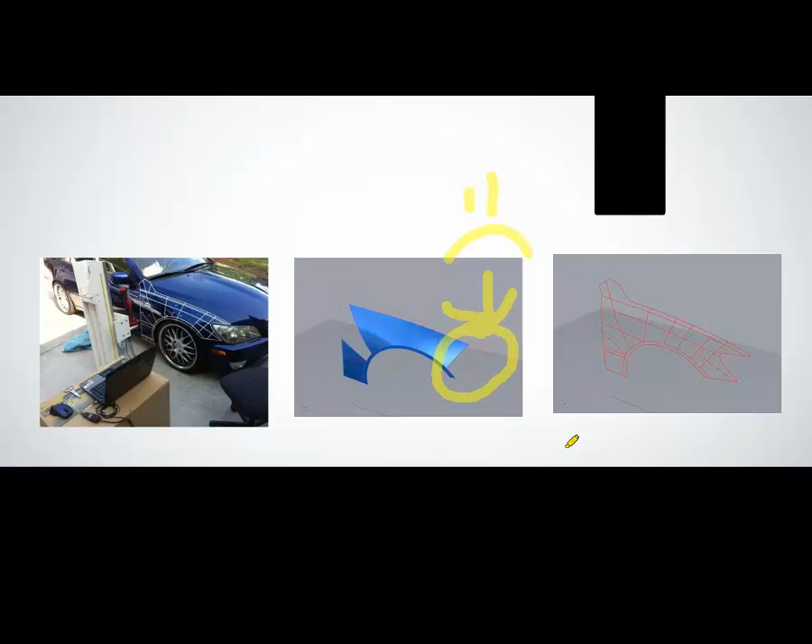You'd rather overbuild that surface and then just trim it back. And then another couple things we noticed looking at this is there's a couple funky n-gons in here -- a couple five-sided faces, especially toward the rear, going up at like a 45, there's an n-gon in here, right in there.

So there's a couple different things you could do. Yeah, so that's going to cause you a bunch of problems. Yes, frowny face indeed.

If you want to take the super simple Kyle approach, which is make it as basic as it can be until it falls down upon itself, you would simply suspend any and all thought process while doing it. Right, just mash the buttons until it works. Just mash the buttons with your elbow until something happens.

You could weld together that gap between that rear-going panel and the one that goes up at a 45. Exactly -- you could just weld those together and you'd have a much, much happier topology, something that you can go from.

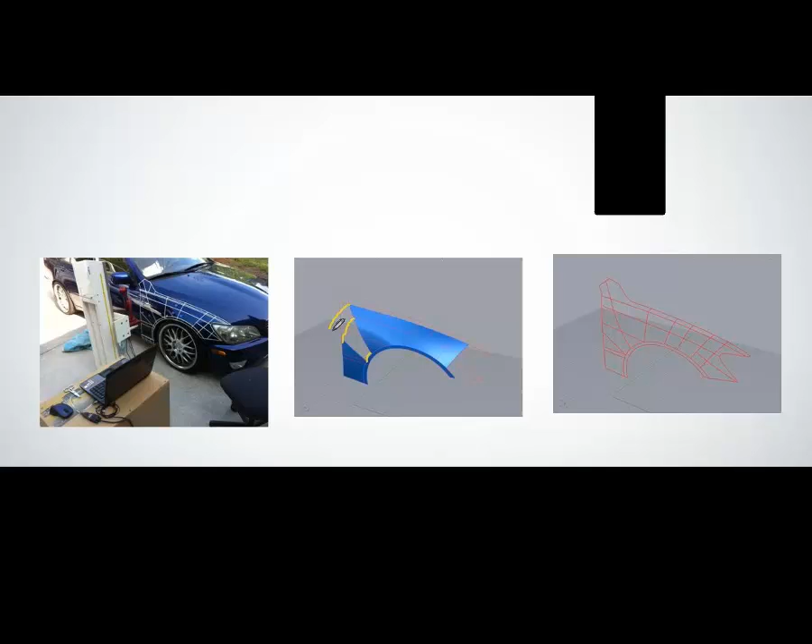Yeah, right. Don't even bridge that. Just weld that and then move that vert, that corner top vert, backwards to where it really should be. Yes, exactly. So Kyle, you want to talk any more about this?

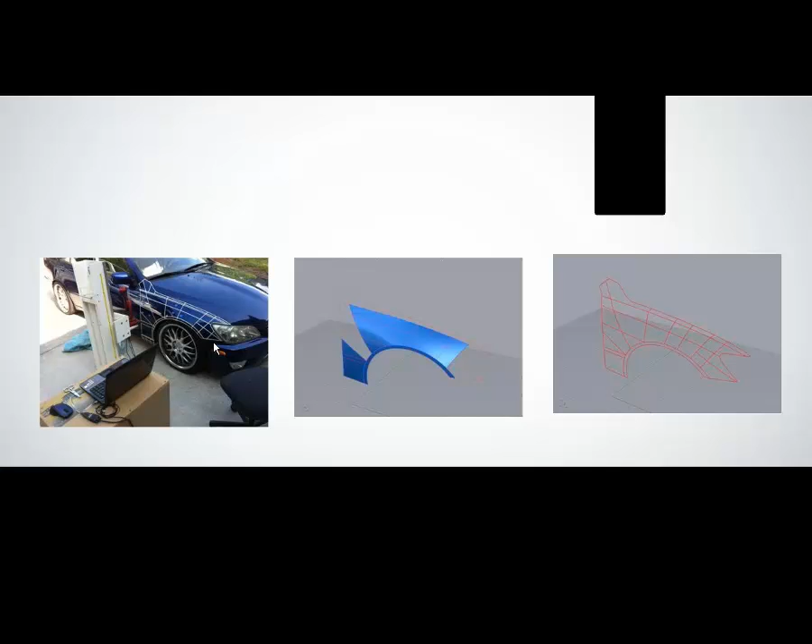I tell you what, why don't we shoot over to your screen and show a little example about how to lay something like this out, and we'll talk a little bit more about that. We were looking at this yesterday, and we were having a bit of fun with the amount of stuff that was laid out on that screen.

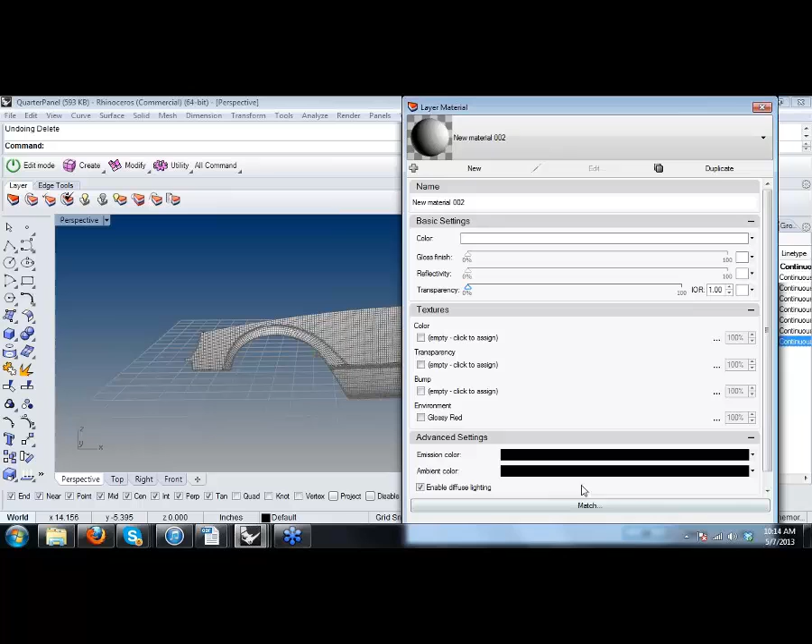There's an extraordinary amount of complication going into that fender, and I want to show you how Sky would handle this. Let's just assume for the purposes of argument that this is a scanned fender, and you are talking about how to reverse engineer it.

And so Sky's going to show you how to do this. He does this a lot. He's way better at it than I am. So I'm going to have him demo it, because he actually has some appreciable talent, whereas I'm good at convincing people that I'm talented when I'm really not. So let's go ahead and let him show this, and then I'll come back and yak at you a little bit after he's done. Actually, I'll probably stay on and make fun of him along the way.

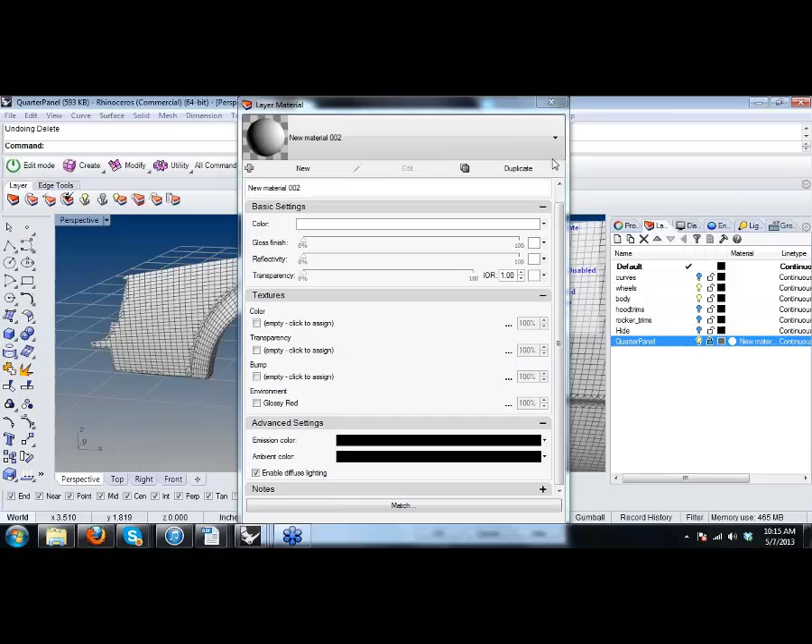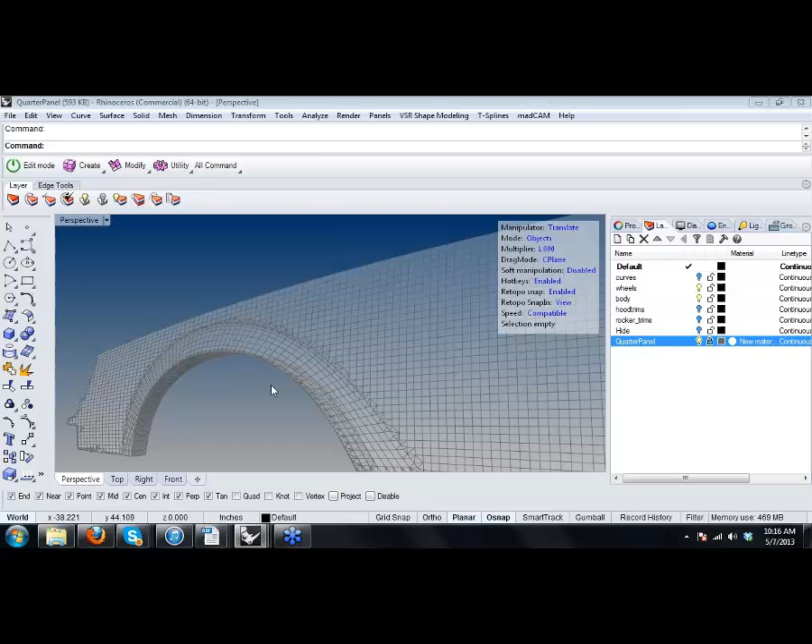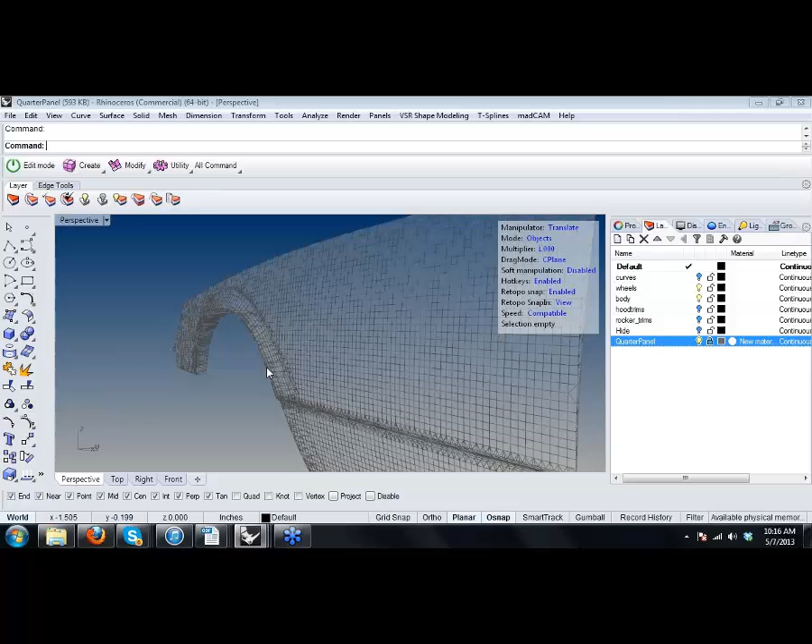Well, we're going to look at this thing then as a mesh. So we're kind of faking some quarter panel data here, like faking it as laser scan data. We just took a car model and turned this car model into a mesh. We're pretending that this mesh data here is laser scan data, because typically when you get laser scan data, it's mesh data. So what you've got for just this quarter panel is it gets really thin up here. You've got this sort of fender arch here. And the rest of it's pretty darn simple and smooth. And then down here, you've got a little bit of a return.

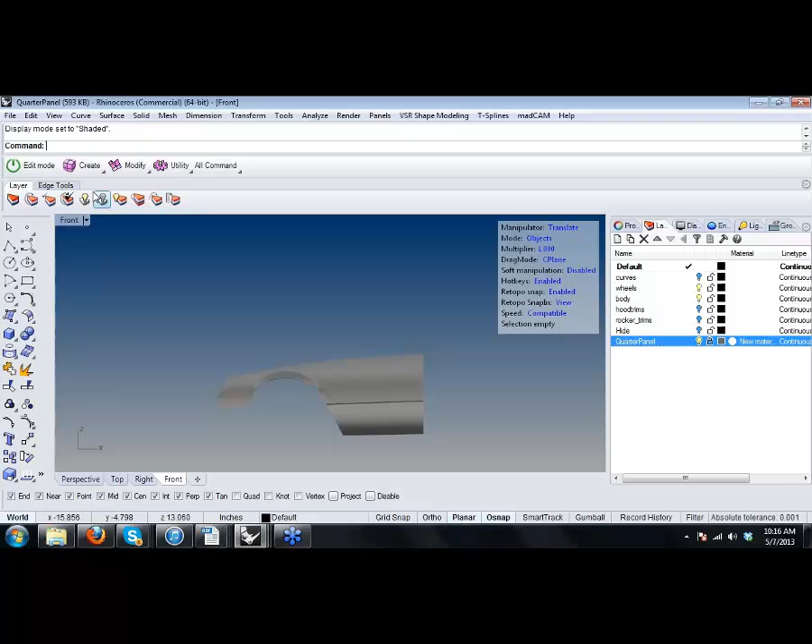And so the way that I would think about doing this, first of all, all of these quarter panels are going to get made really the same way in terms of patch layout, which is to say that you're going to have, let me just make a little face here. Okay, so all these quarter panels, they all start in exactly the same fashion.

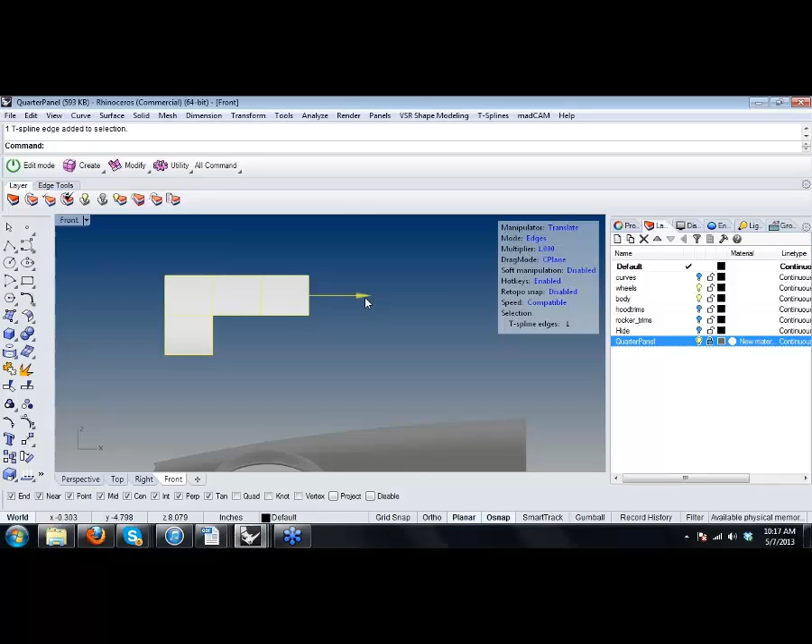Oh boy, let me turn off my Retopo snap. There we go, thank you. Now let me put this in box mode. So in its simplest form, every single one of these quarter panels is going to end up looking just like this.

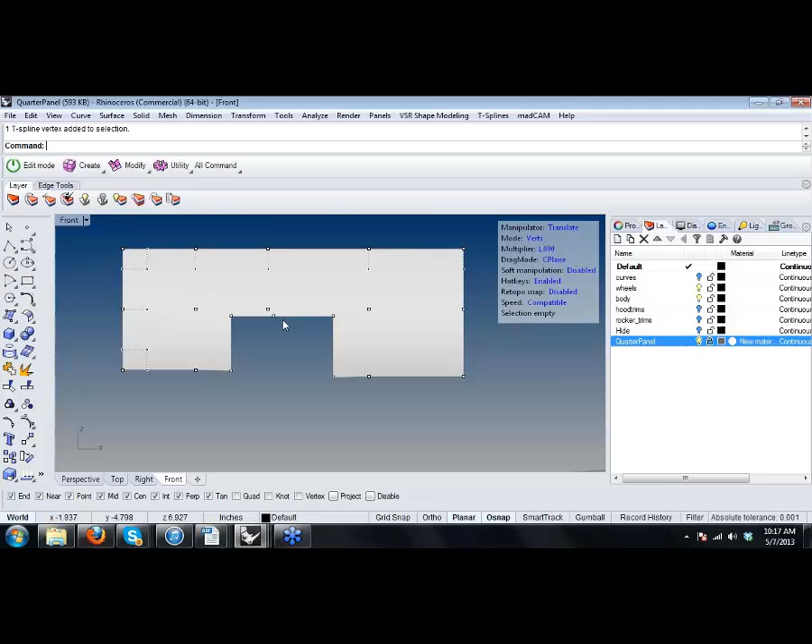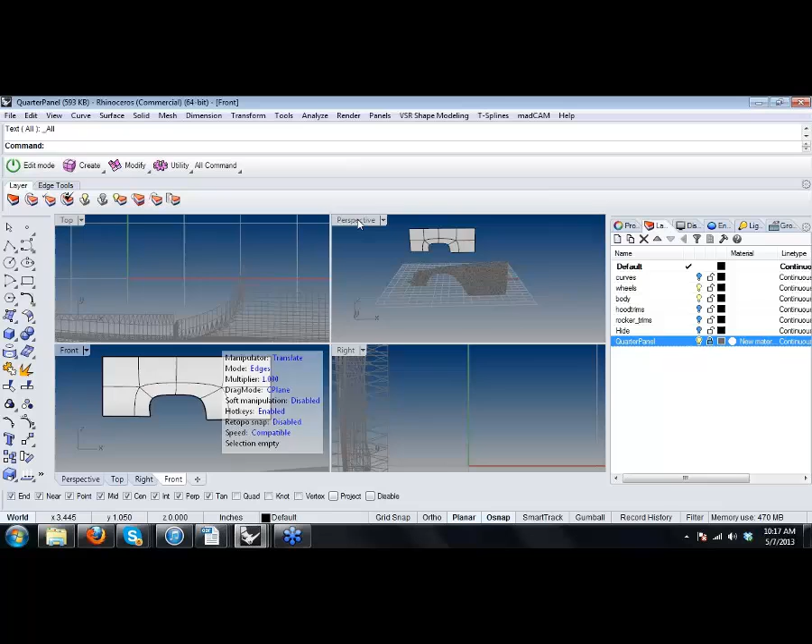Where you punch a hole in your T-spline, and then you extrude it inwards. And so you really want to try to never make them, like Kyle said, more complicated than they need to be. So you can see I can grab this here and just kind of bump it out. And we have the very proto beginnings of what this quarter panel should look like.

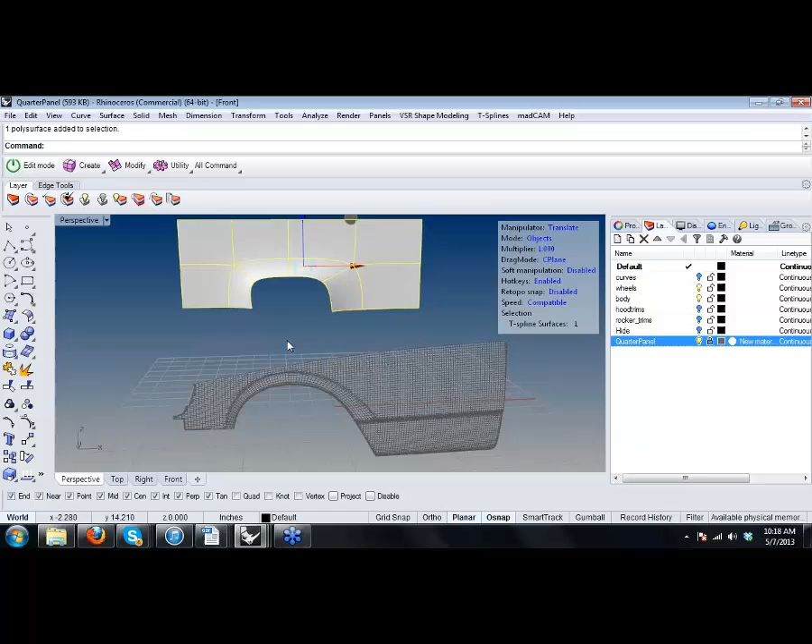Now, when you get to something specific like this actual quarter panel instead of like a proto quarter panel, let me leave that up for a second. You've got this row of faces running across the top, and then you've got a row of faces, or sort of this arch here that forms this kind of break, and then you've got these edges here that form the interior.

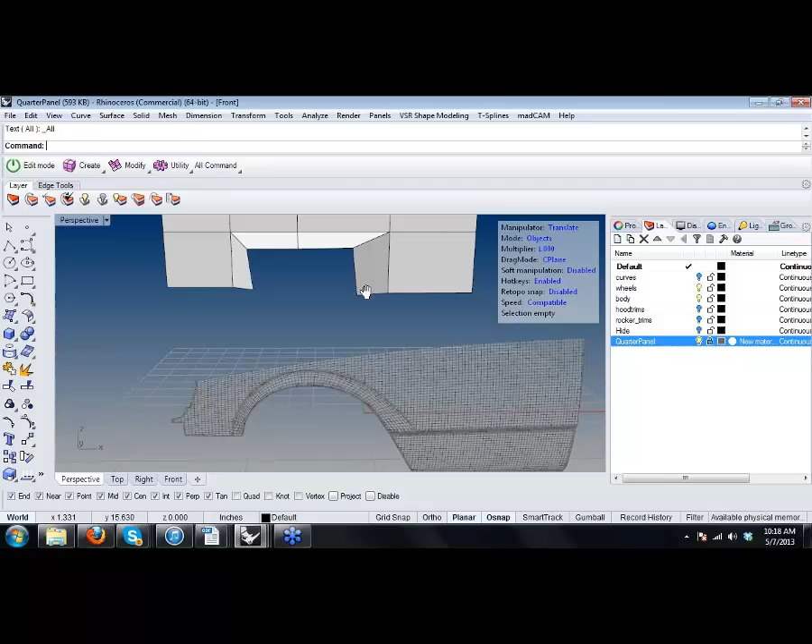And so when you think about this one in specific, you realize that this row of faces needs to get really, really skinny up in here. And then it can sort of expand out a little bit if you need. But what I would do with this thing here, let's get rid of our proto panel. And let's get our actual one.

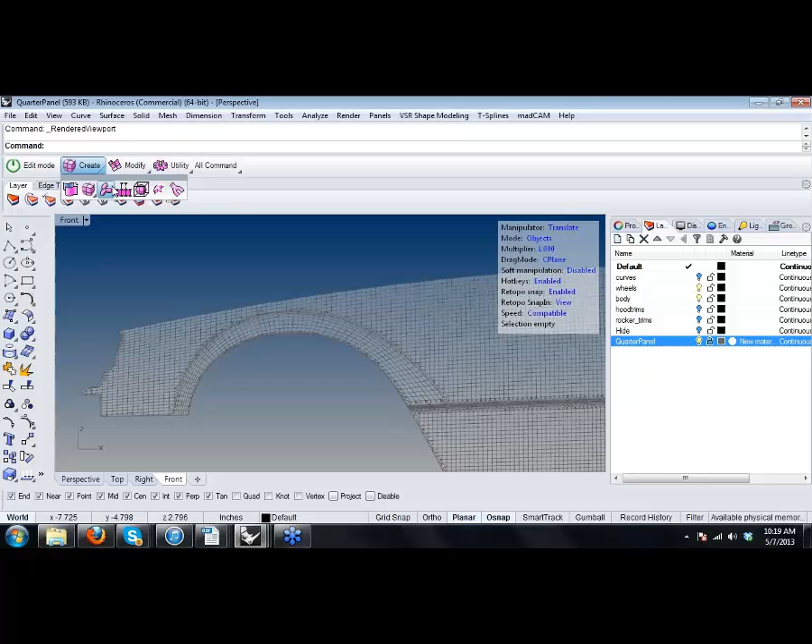And I'm going to turn, in this case, my retopo snap on. So it's just going to map faces right onto this. And I'm going to use the append face workflow. So I know that I need a strip of faces across the top, and it's got to be really, really skinny, right? It's got to be really thin to make that.

I'm already thinking about how I'm going to extrude in. I usually want to make those extrusions come at a 45 here and a 45 here. So if that's what I want, I need to move this here so it can come in at a 45.

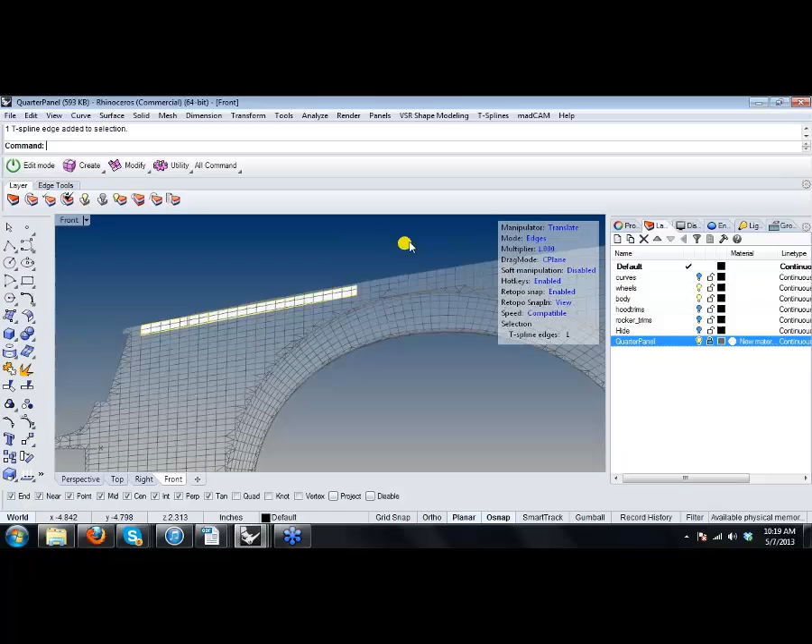What I'm going to do now is bring a face to right here, so all I'm doing is alt-clicking. I hold the Alt key and bring it over. I've got my retopo snap on, so it's retopo snapping as it goes. I'm going to hit this one here so it extrudes inwards in this direction.

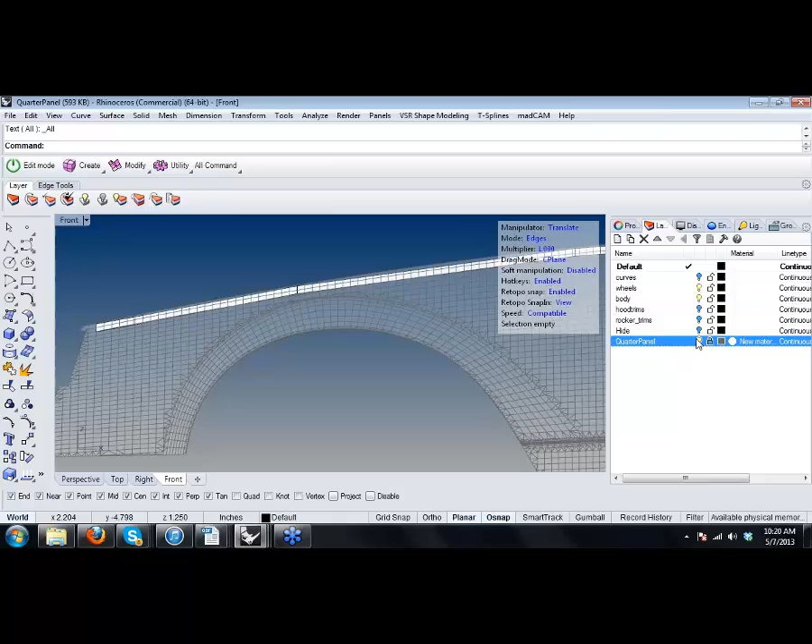Then I'm going to bring up one more, just like this. So I've got this super skinny T-spline right now. Let me turn this off - just a little thin strip, just the beginning of where I want to put this stuff.

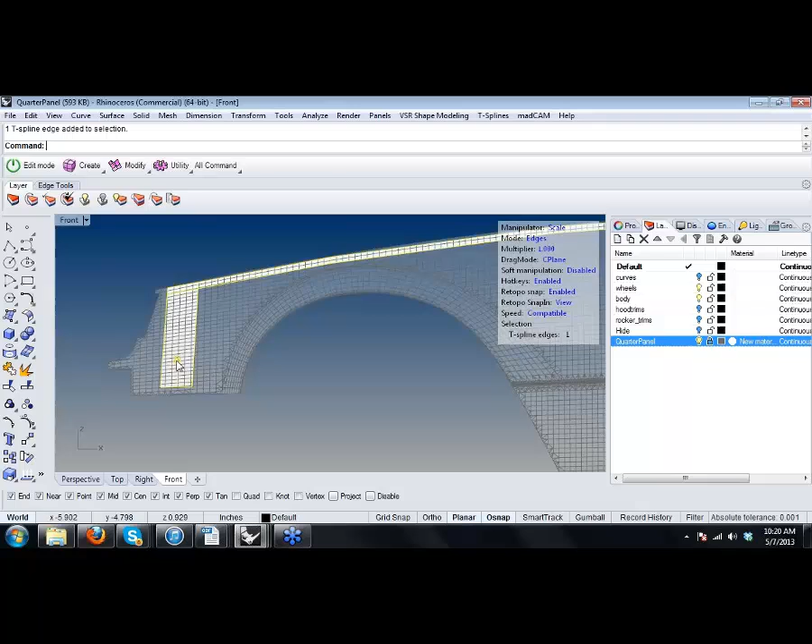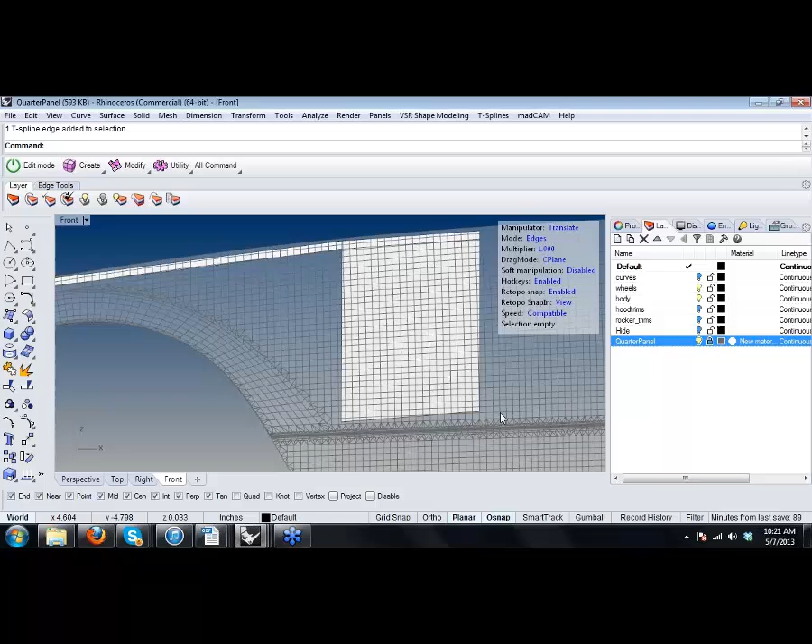Notice everybody how simple this is - he doesn't have a million faces in here, these are all just minimal. You always want to start simple, keep saying it over and over again. Simple, cannot stress that enough. Really cannot. Because you can always add verts, add complexity, geometry, but like Kyle says, the less stuff you have, the easier it's going to be to edit this thing, and typically the smoother it's going to look.

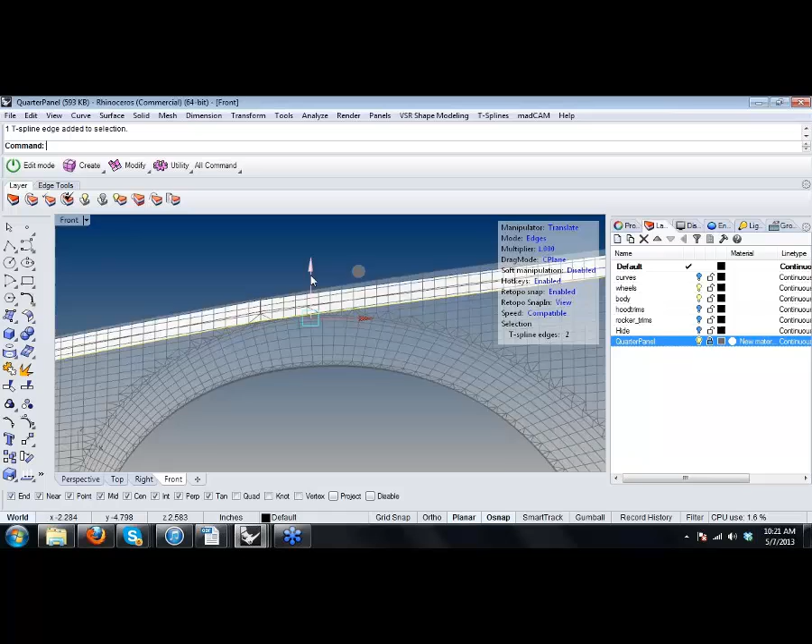So now I've got something I can start to play with, and I'm going to again alt-click, so I'm extruding inwards now. I'm just going to deal with this little strip first. What I'm going to do is take this vert I created and bring it into here. And this vert, I'm going to bring it into here.

Okay, so if I try to go smooth on this thing, it just all sort of falls apart because I've got this funky thing going on. But what I can do now is extrude this - I alt-clicked and brought a face off here, and then I'm going to select this vert and weld it to this vert.

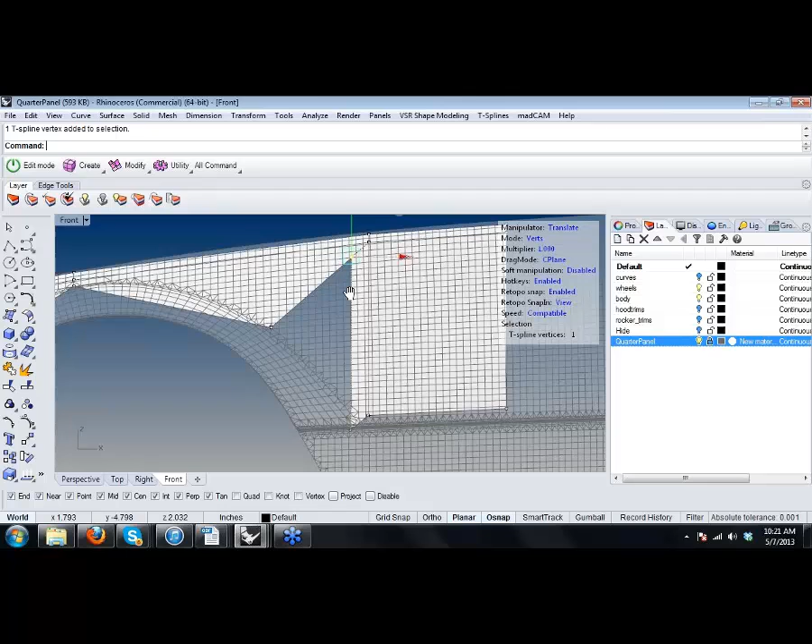I'm going to do the same thing over here. I'm going to bring this vert kind of over here. So you can see what I'm doing is trying to line these verts up for now, just along this break between the smooth and this bump out.

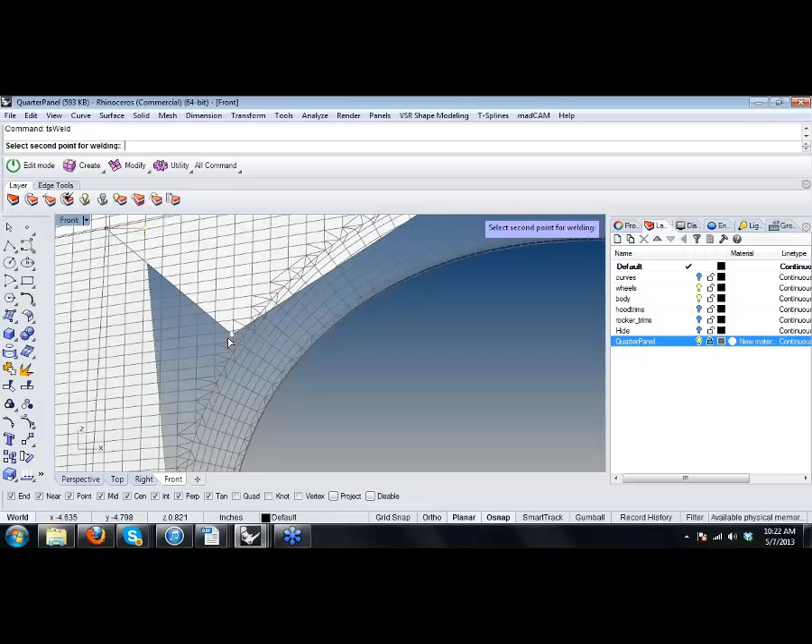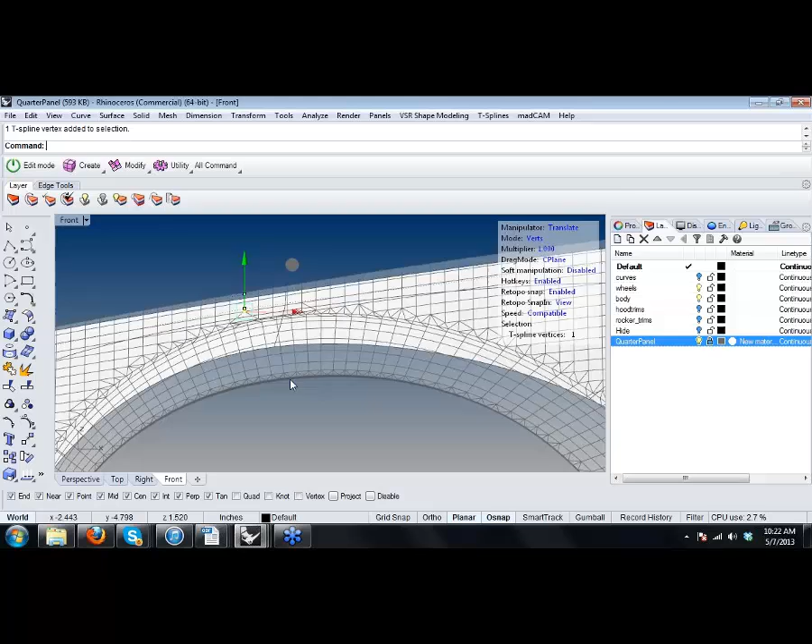So now when I go to smooth it, I've actually got something that - this is so incredibly loose right now that it's not really going to stick all that well to my actual data. I need more density than this, but it's at least topologically correct. This at least gives me a starting point of where I can build this quarter panel from, and it's at least correct, right?

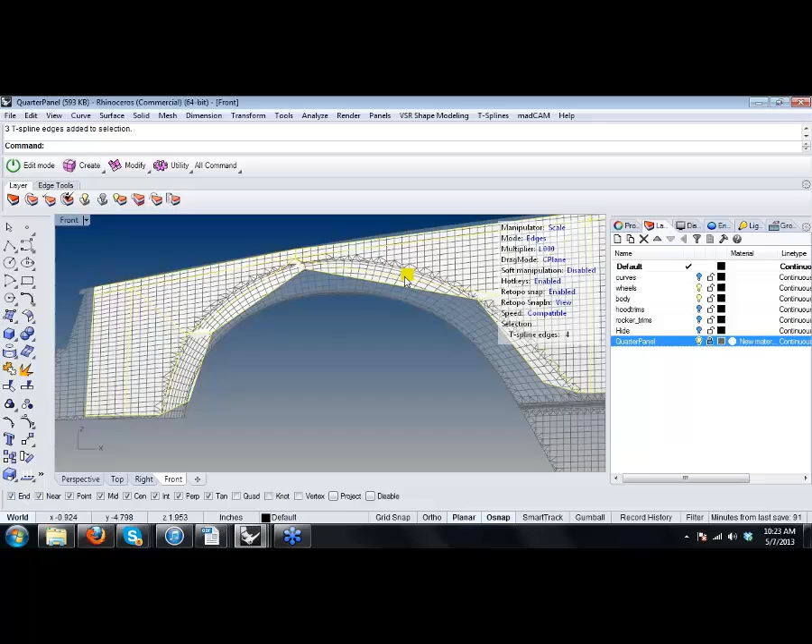So now that I've got this, I can grab all these and extrude inward here. And so all these points are going to form the basis of the edge here.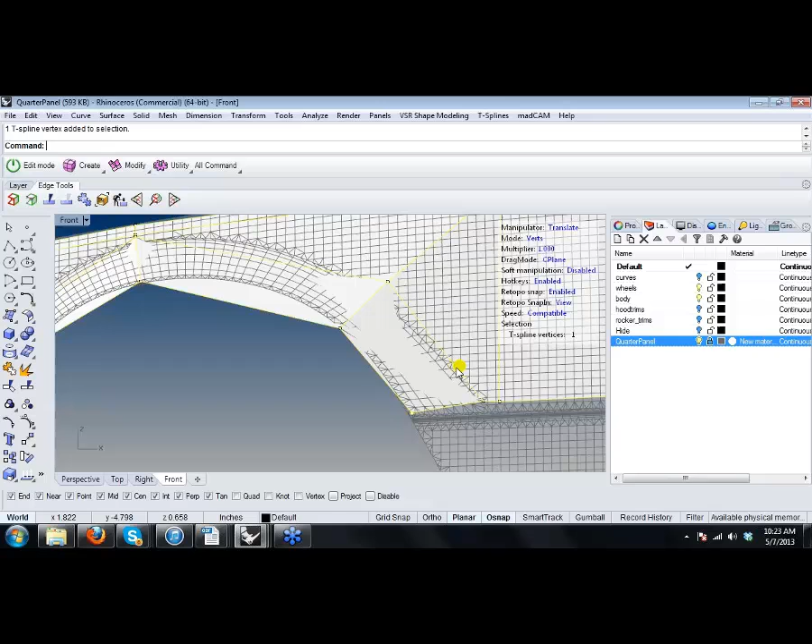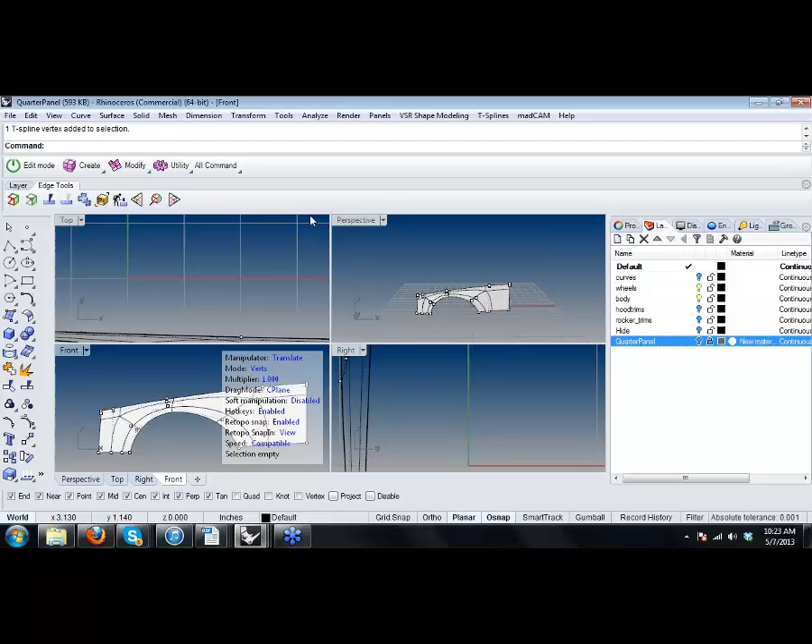Okay, so from here what you can simply start to do is really start to add geometry where you need it in order to achieve the shape that you want. So places where you would definitely add geometry - let me look at perspective here. In the quote-unquote laser scan data that we have, let me switch back to this.

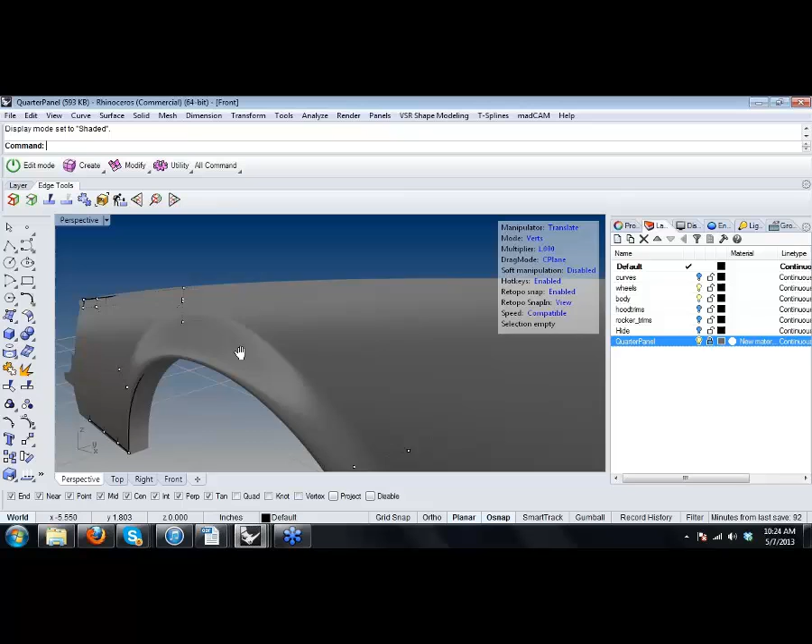There's definitely a bit of a sharp break right in here, and so you're going to want, in order to model that, extra verts along here. So this is a great place where you could use TS bevel - that would work very nicely in here, that's a great new command.

Let me bring that up, here we go - bevel edges. This is a great way to... let me talk for a second about how that works, about how bevel works.

Okay, so all you're doing is adding geometry along this loop here. And you can do it either as a distance from this loop that I selected, or this series of edges, or as a percentage. So here it is as a percentage. In this case, because the break is rather uniform, I would use a distance here.

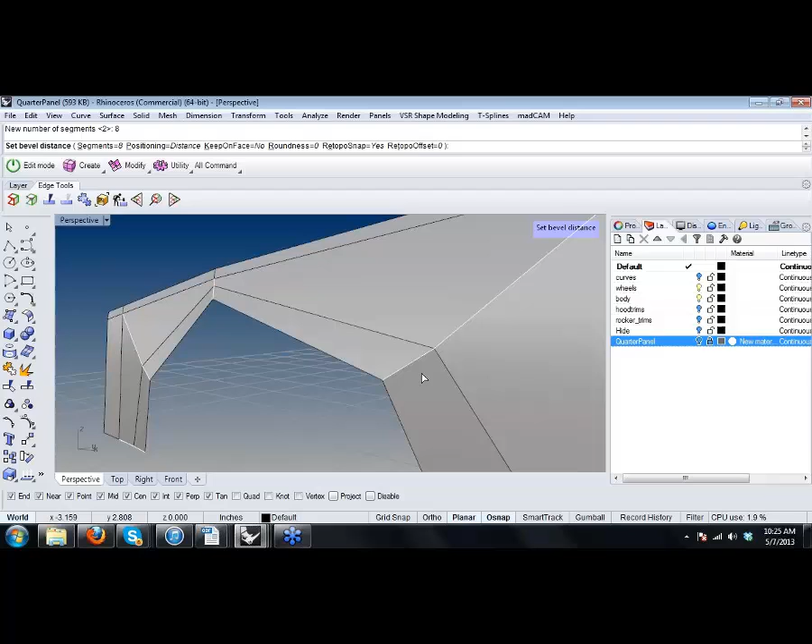And then the segments, in this case, I would use like 2 segments. You could go crazy and say I want 8 segments in here, and what you'd end up with is this crazy bevel thing. Obviously we don't want that - we want something like 2 segments in here.

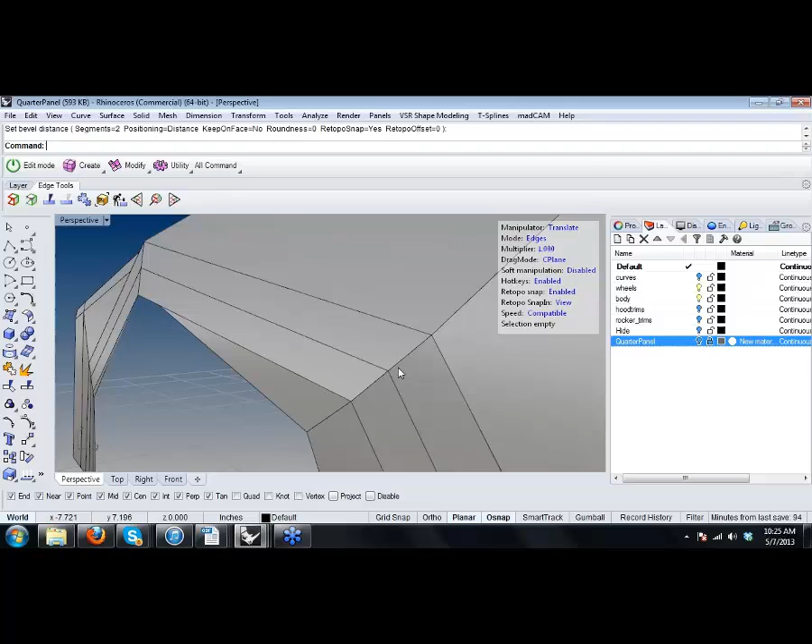These roundness settings are a little more subtle in terms of what they're going to do, but I can just come in here and add something like this. Now, why did that go funky? Oh, probably because retopo snap was enabled. Let's turn that off and run that again.

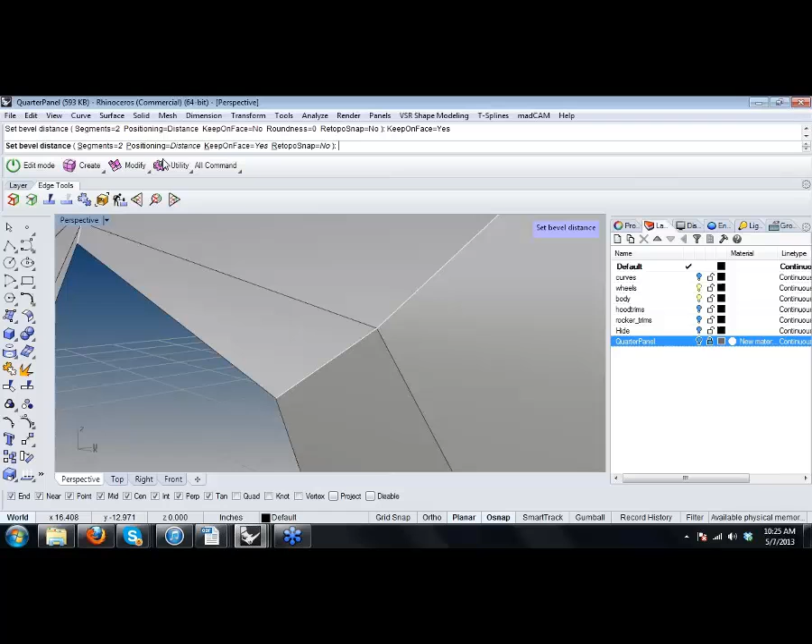And retopo, no. And keep on face, let's say yes. And to positioning distance, great. Okay, now let's do this.

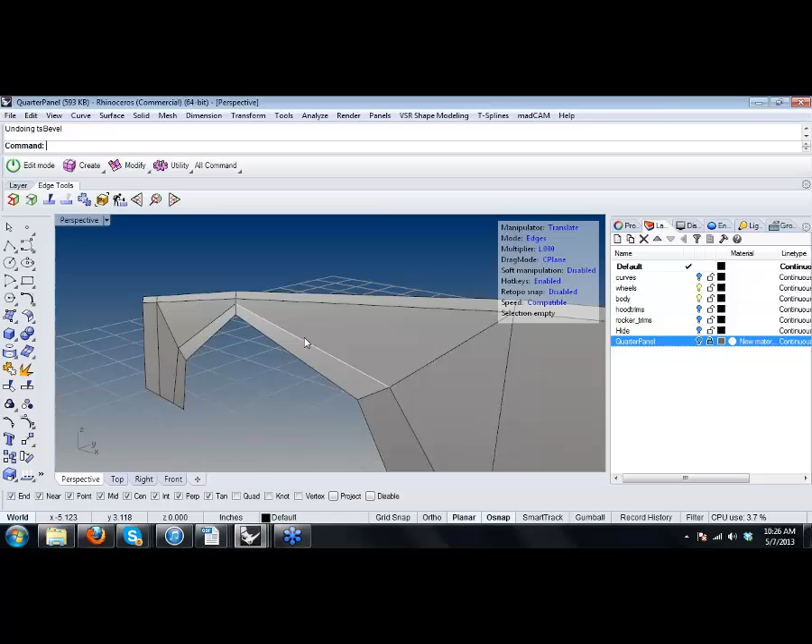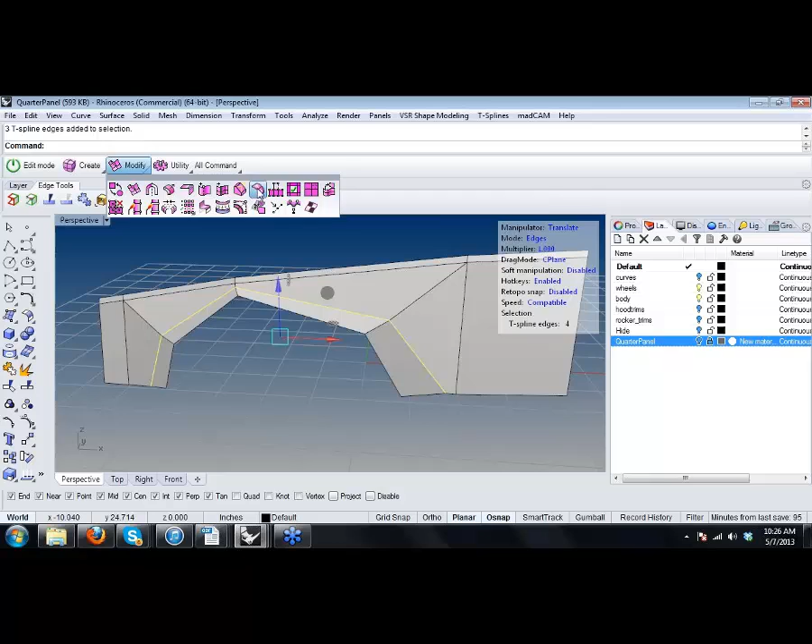Just one other comment to make, to clearly state your approach here and how this is different than NURBS. What you've done is you've really done a very loose approximation of the shape, and now you're firming it up. In NURBS this would be different. In NURBS you would have almost a crisper or sharper approach, and then you'd be smoothing that later to get the aesthetics. So the approach really is almost backwards in that regard, which is just something to keep in mind if you're coming to T-Splines from NURBS.

I'm not sure what's going on there, but if you could also try the TS insert edge command, which could get you... Yeah, I was just going to say that. So there's more than one way to skin the cat here, and that's to use TS insert edge. In this case, let's do insert edge simple, and let's just put a little more geometry in here.

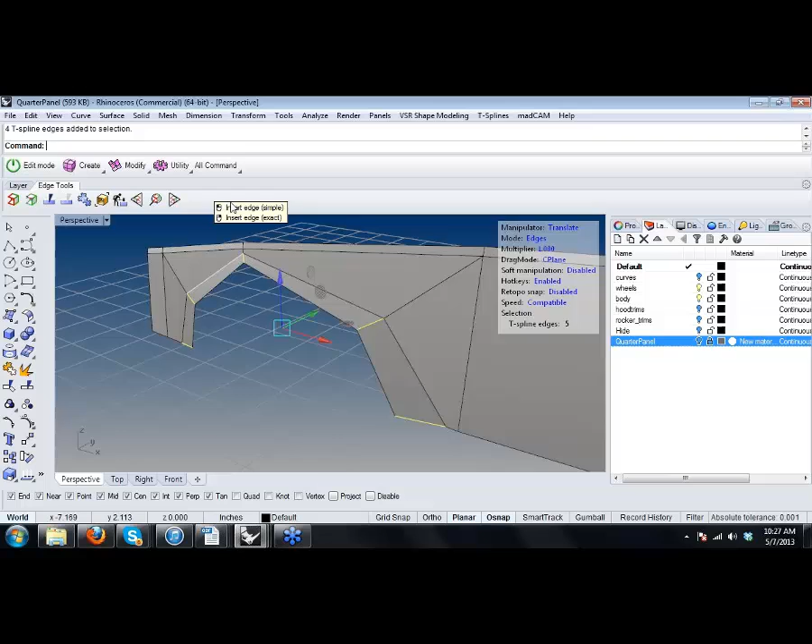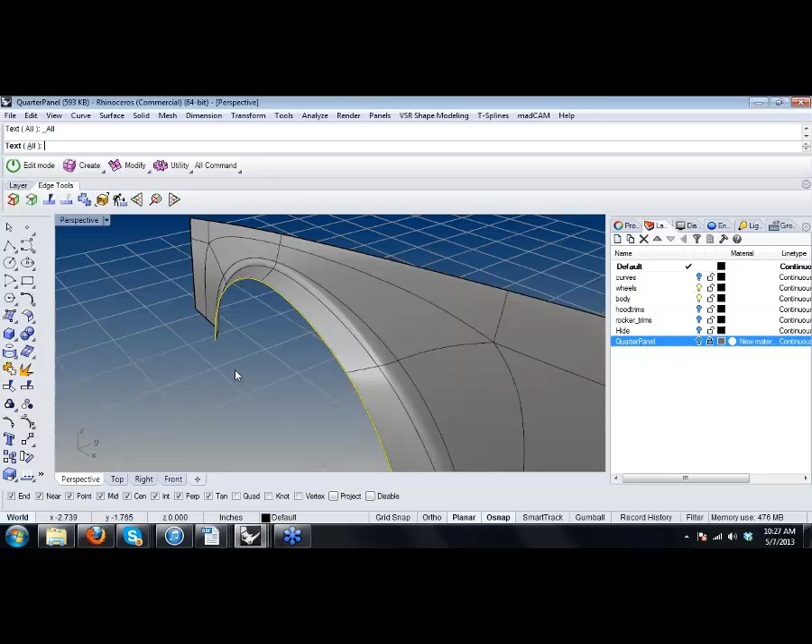So now what you'll see, and we're going to talk about make uniform a little bit later, but I'll run make uniform on this. So now what you see, the more verts or edges that I add along this sort of break here, the better I'm going to be able to sharply define that kick out. Like the more defined this crease becomes.

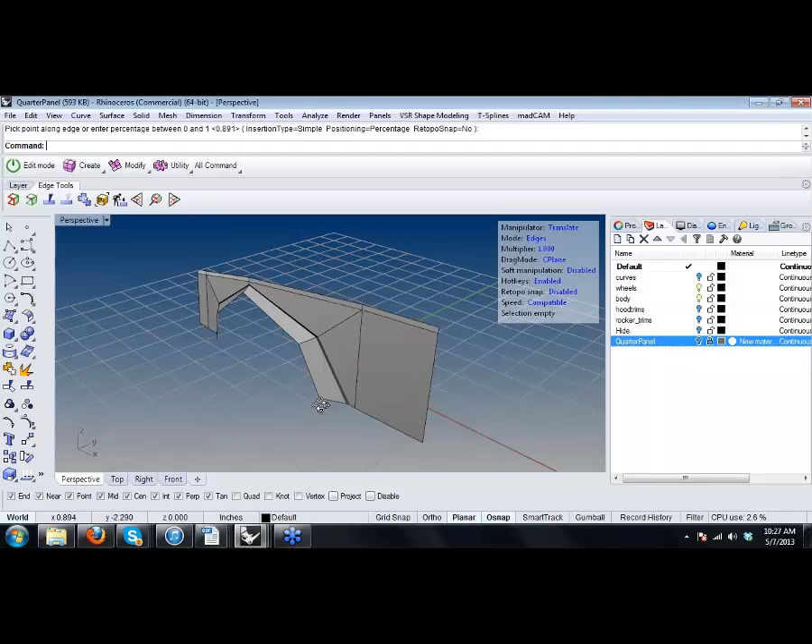Let me take it even farther and throw another edge in here. And this is really how you can play around with shape and form. So you can see now we're starting to get like super crisp. We've got 3 edges here, and we get this really, really crisp break.

So that's sort of how you would control this stuff in T-Splines, which is really, really different from how you do it in a NURBS approach. So any more you guys want to add to this?

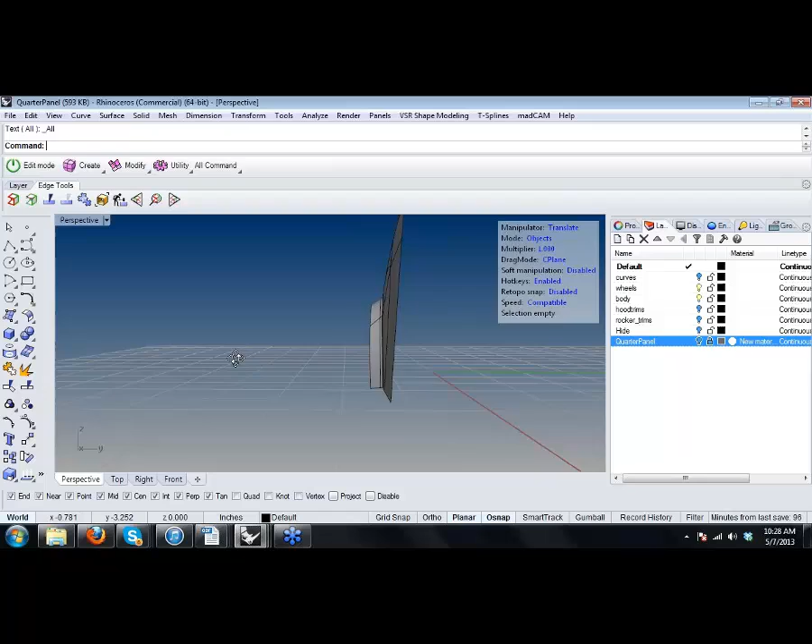Just as far as pacing, I want to move on to the next example, but I wonder, do you have any geometry in the scene that you could match up that edge to? The edge of the wheel. Not really. Thank you for putting me on the spot.

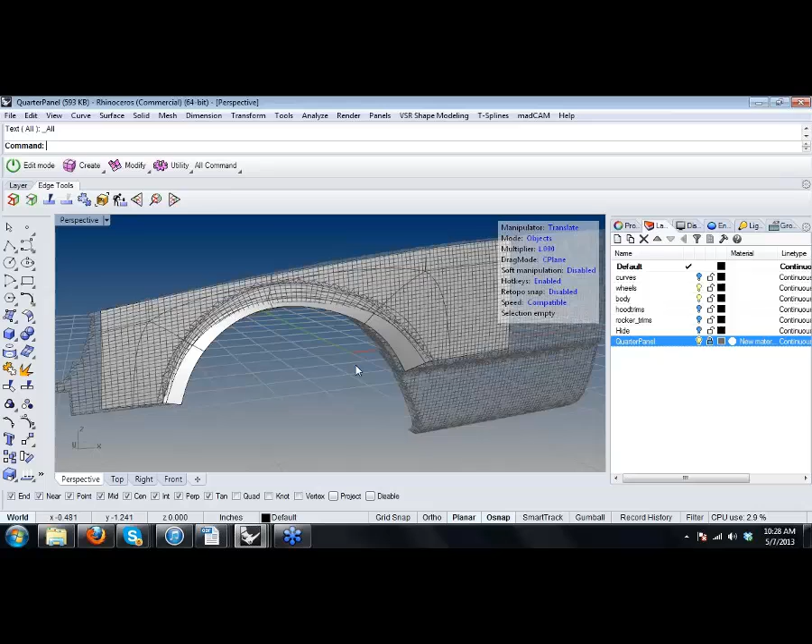You could snap a curve to the verts on the top of the fender, and then match that to the curve. Right, let me unlock this. Let me hide this for a second. So we could draw a curve. Let's just insert a curve through our verts here.

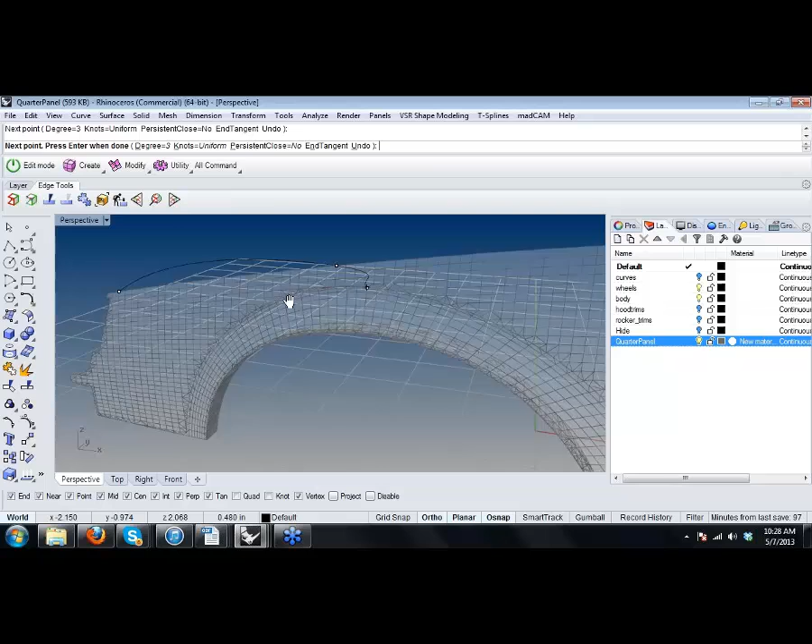Along this top edge. This is new for V5, by the way, you couldn't snap to verts in V4. So if we wanted to, I know where you guys are going with this. We could run TS match, right?

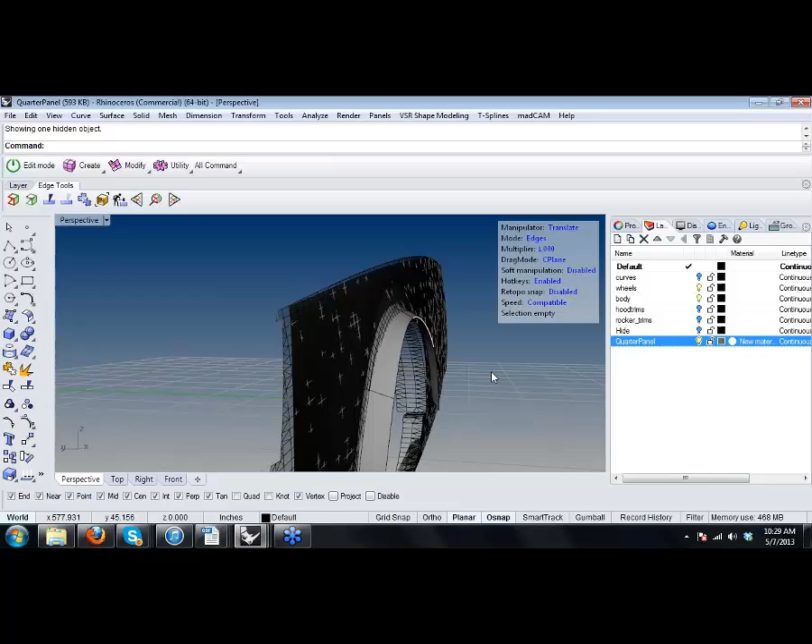So we've got this curve that kind of defines the upper edge here. You can either point edit this thing. Let me turn off my quarter panel. Or you can run TS match and say, I want to match this to this.

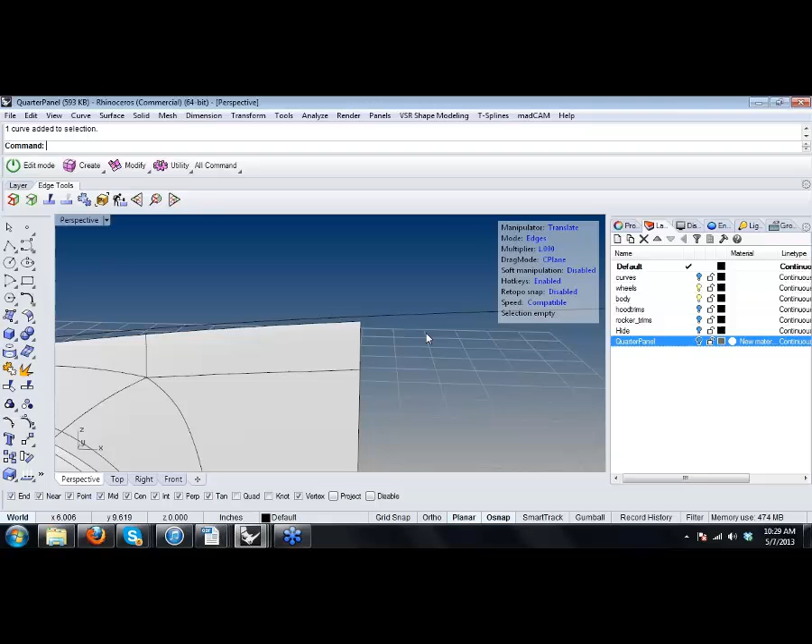Yep, and then there's a whole bunch of options there. But what I just wanted to bring up is that this workflow of starting simple and then getting it tighter matches kind of the final tool that you can use once you've pushed and pulled all the vertices as far as you want to really match to specific detail, a better matching object. Exactly. So let's just do a couple here.

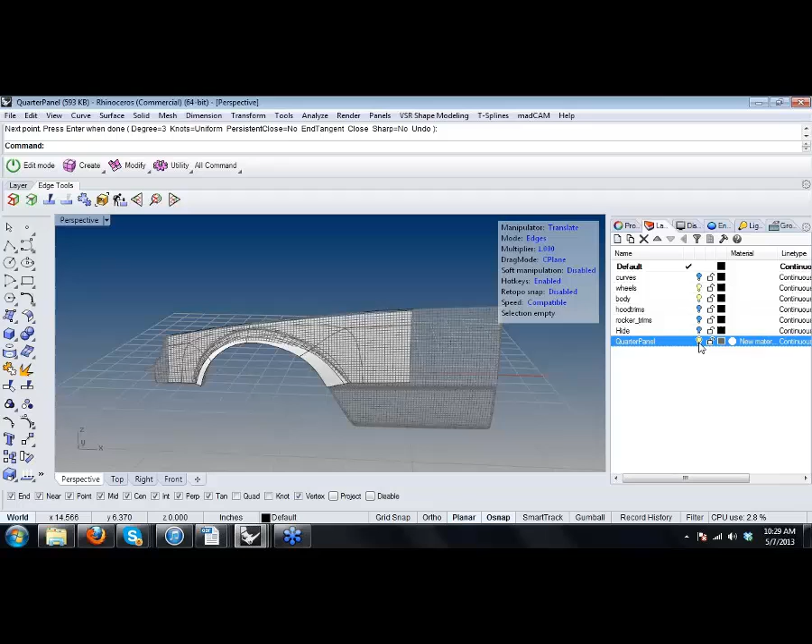There we go. Okay, so TS match is a wonderful command. Let's take this edge here and match it to this curve. And there we go.

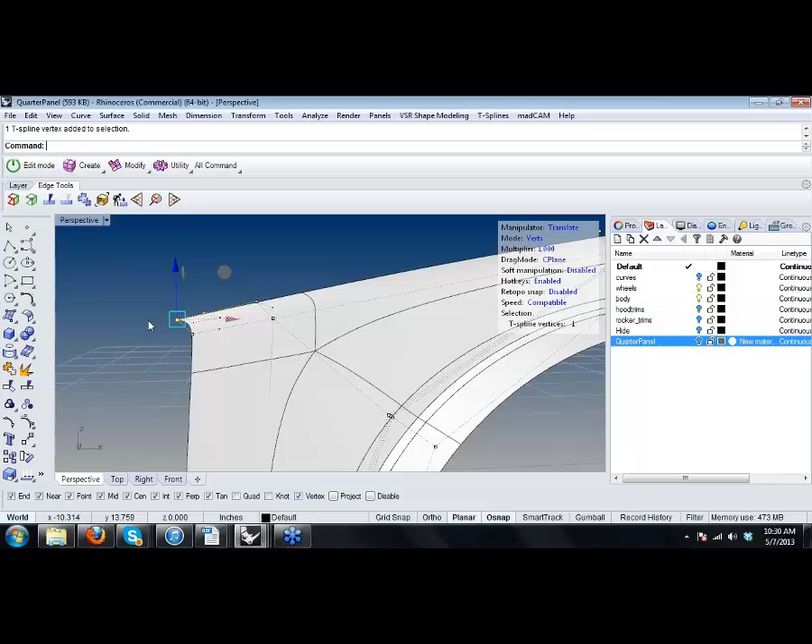So if you can sort of pull out curves that you want to match to, you can do that really easily with T-Splines. Yep, and so if you've got targets, if there's something that you really want to maintain accuracy on, that's a super nice way of doing it.